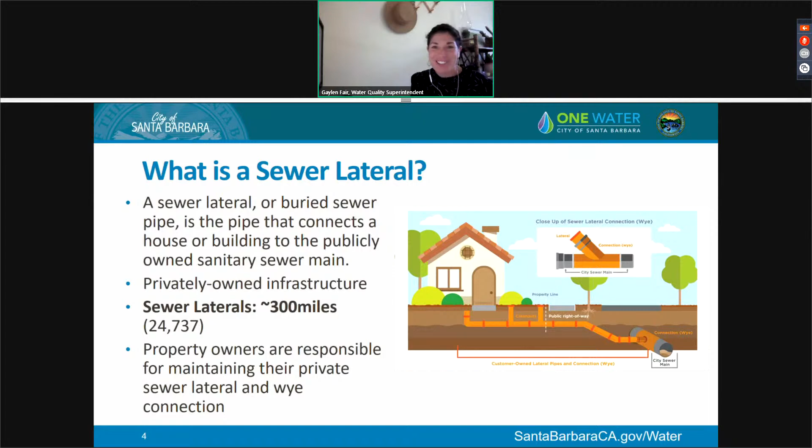So a little bit about the history of the SLIP program. It was developed in 2006 to address failing laterals and increase public awareness of the need to maintain private laterals. City Council passed an ordinance requiring us to develop this program, and it requires property owners to inspect their private laterals under certain conditions, which we'll get into in the next couple slides.

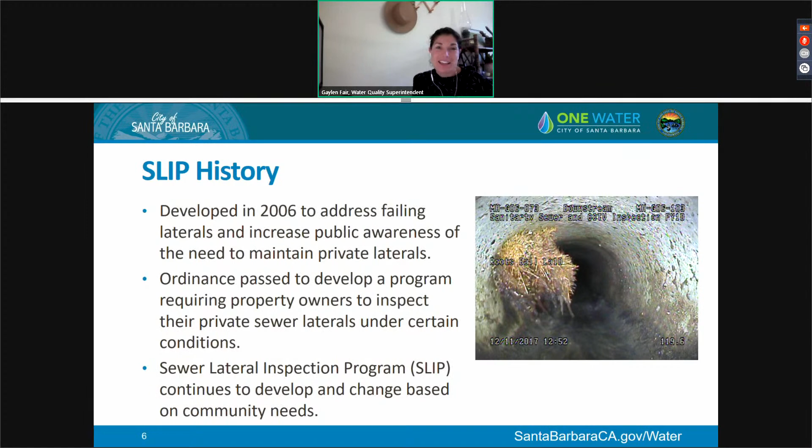The sewer lateral inspection program's inspections are triggered by a number of items. The first is permit initiated. Typically these are ADUs folks are trying to build on their property, or maybe they're remodeling, and they'll be required to do a lateral inspection if they're adding more than 400 square feet, or if they're adding two or more new plumbing fixtures to the site.

Another trigger we've mentioned already is the private lateral spill. If a property has experienced a private lateral spill, there's obviously something going on, a blockage or something happening on that private lateral. So we want to understand and help the property owner understand what's happening, and we request an inspection from them in those cases to get to the bottom of the issue.

Another trigger is defects observed at a connection during city main inspections. The city has our own infrastructure, and we go out and do a great job maintaining those sewer lines, videoing them and doing inspections to make sure our public assets are free and in good working condition, free of roots or issues, and conveying sewage as they should.

When we go out and do these video inspections on our own mains, what we can see is the connection of the private lateral to the city main. If there's any issues at that connection point, be it roots, a fracture, or a crack, we will notify the customer and ask for more information, letting them know we noticed an issue and requesting a video inspection of their entire sewer lateral, because if there's an issue at this point, there are likely issues in other sections of the lateral.

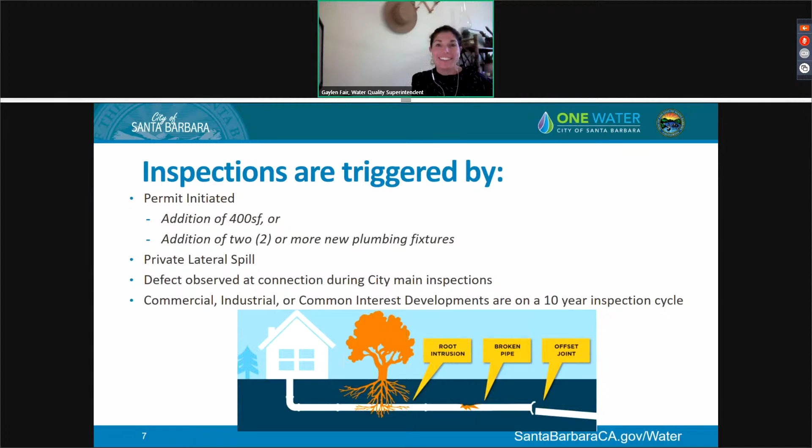So a little bit about the SLIP process. We understand that it can be very confusing to somebody receiving a letter, not understanding what the process is. So let you guys know what our process is.

First, it starts off with an inspection notification letter based on any one of those triggers we just talked about. In that case, a property owner will hire a certified plumber. That certified plumber will inspect the lateral, and they will submit the video and inspection form to our SLIP staff for review. Property owner has about 60 days to submit the video to us.

Once we receive the video, we will review and determine if there are any defects or if the lateral has been properly maintained. If we do find defects, we will call those defects out. We will send out a repair notification letter to the property owner.

And this is really our chance to work with the property owner, communicate with them, develop a plan with them. There is a lot of variability in lateral materials and the different defects that are occurring. So we can set up one-on-ones with property owners and guide them through the process.

Once we've had that chance to communicate with them, they will decide on a solution, hire a plumber or contractor, complete the repairs, and then at that point, they will have a certificate of compliance issued. And that whole repair process, we are asking 120 days for them to complete.

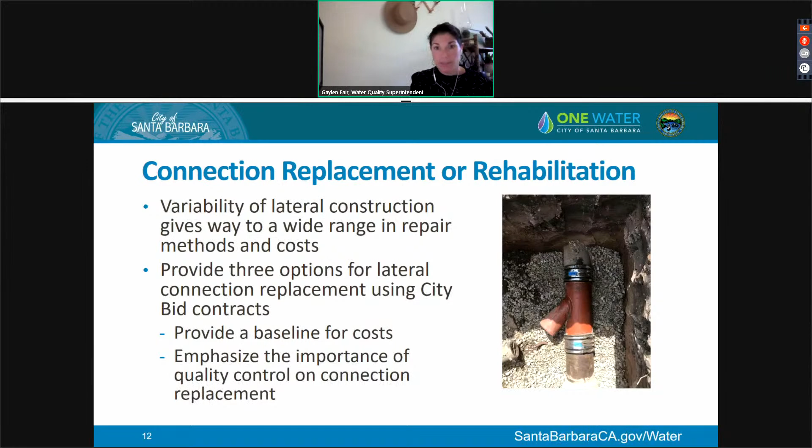So here are the 3 connection replacement or repair options that we have developed. Repair option 1 is a sewer tap or sewer connection replacement. This is the original option that we've been working with throughout the program.

A property owner will hire a plumber, and the plumber will dig the pit. Just to be clear, this is for the lateral connection. It's usually done in the right of way or the street. So this is what brings on the most challenges for property owners.

In this option, the property owner will hire the plumber, and the plumber will excavate the pit in the street. If there is other work needed on the lateral, the plumber can do it at that point. But then we have a city contractor come in and replace just the lateral connection, and then the city contractor's job is done. The plumber will fill in the pit and do any other additional repairs that are needed.

Our repair option 2 is a sewer tap replacement with excavation. In this case, it's just the city contractor who's doing the work. The city contractor comes in, they dig the pit, expose the lateral connection, and then they replace it and backfill. This option is a great one, but if there is any other work needed on the lateral, it might not be the best option. That's why we really want our customers to talk to us beforehand so we can evaluate what's going to be the best option for them.

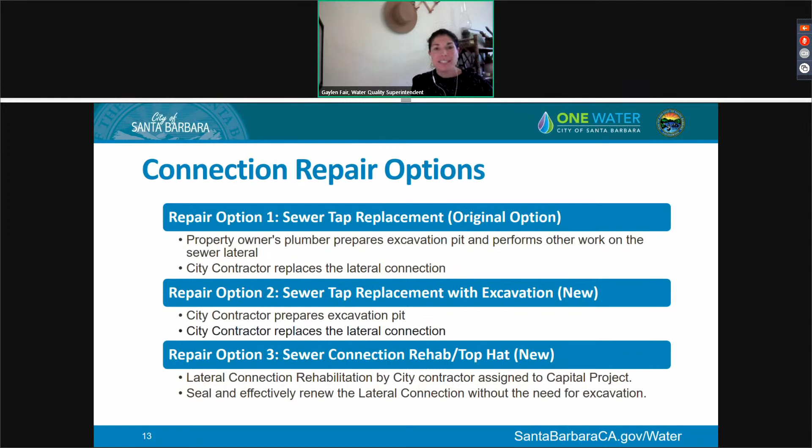Next we'll talk about our video assistance program. I'm going to pass it off to Mariana Cruz, and she's going to walk you through it.

Good morning, Chair Keller, members of the Water Commission. My name is Mariana Cruz, and I am the SLIP Program Administrator. I'm here today to talk to you about the Video Assistance Program.

The Video Assistance Program, or the VAP as we're calling it, is a program that was established to really help property owners with the first step of the SLIP process. As Gaylen showed earlier, there's several steps to receiving a certificate of compliance, and our goal is to help them get started with that process.

And in order to fund the VAP, the SLIP program will be reallocating funds. Currently, in order to help property owners, we are paying to waive the public works permit and inspection fees. Our program is covering that cost on their behalf.

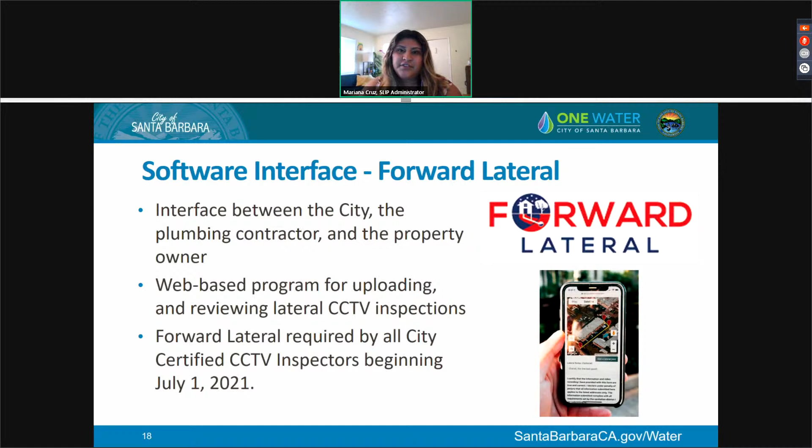The software is called Forward Lateral, an interface that will help connect the city, the property owner, and the contractor. It's kind of like one place where everything can be found. The inspector will be able to submit their videos onto Forward Lateral, and the property owner and the city will be able to track the entire inspection process. We're also hoping to have Forward Lateral be mandatory for all city certified CCTV inspectors starting July 1st of this year.

The cost of Forward Lateral is $30 per inspection. However, those enrolled in the Video Assistance Program, the VAP, will have their Forward Lateral fee covered.

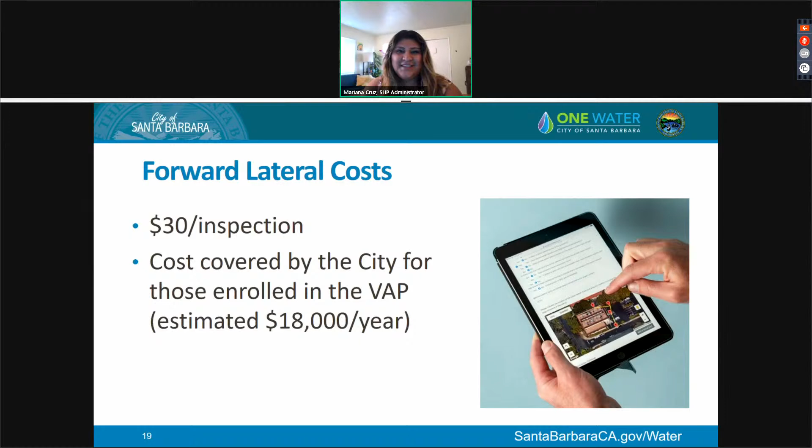There are many benefits of Forward Lateral, including transparency, efficiency, communication, and storing of data all in one place. This is really important, especially in terms of efficiency and time.

The property owner will have access to their video. It'll be stored in Forward Lateral, and they can go in and check it anytime they want. That also cuts back on staff time making copies of videos or needing to meet up with contractors to obtain the videos from them.

The property owner will be able to track the entire process of their inspection. They'll know when the video is submitted by the plumber, when the city has reviewed their video, and they'll be able to see comments on both ends. It really is one place for everything to be stored.

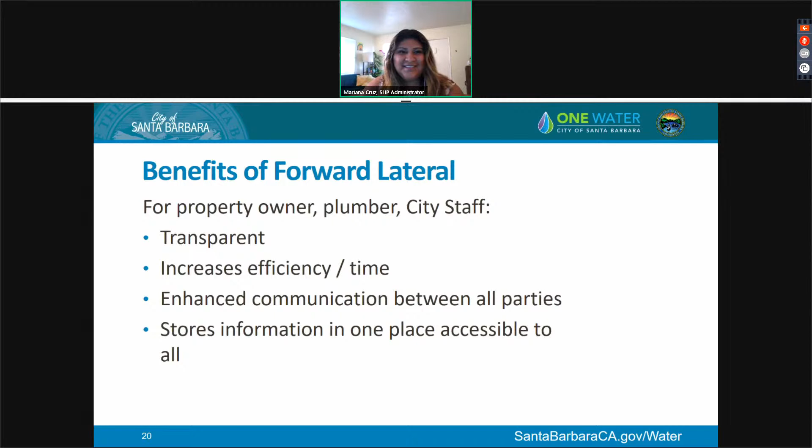So COVID-19 and SLIP, just like every other program within the city, we have had to pivot and make some adjustments due to COVID-19.

One of the things we've really been working towards the last few years is our enhanced public outreach and education. Pre-COVID, we were doing one-on-one appointments, having after hours office hours, as we were calling them. Folks would come down to El Estero or meet us at Public Works, and we could talk in person to our customers and walk them through the process.

We have really had to pivot, as has everybody, to a virtual format. However, we have found that it has been really successful. Folks don't have to take time off work to drive down somewhere and meet somebody. They can just pop on their computer or their phone and have a discussion with us about their case.

One of the other really great things we have done is our virtual trainings. Every year we do a plumber certification course that has over 100 plumbers in the same room taking our certification course. There are logistical things to work out: parking, space big enough, enough food, coffee and donuts for everybody.

Good morning, Chair Keller and Commissioners. My name is Allison Thompson, and I'm the Operations and Policy Coordinator for Heal the Ocean. Heal the Ocean supports this program and is so excited to see the program's growth. It is a long-awaited revise, and the revise is fantastic. Ms. Fair and the rest of the Sewer Lateral Inspection Program team and staff have done a tremendous job expanding the program, updating it, and working on outreach with the community to ensure there are resources and information available for homeowners. The options provided to homeowners takes the fear and uncertainty out of the problem and empowers homeowners with knowledge and background on what can be a very complex and intimidating issue. Sewer laterals are vital to the health and safety of our community, and we hope this updated program will help keep private laterals updated, maintained, and working effectively. We support this program and applaud the work of staff. Way to go.

Thank you for your time. Thank you very much, Ms. Thompson. I think that was really a very strong endorsement. We really appreciate it. And of course, to the people who do this work every day, I think they're doing a tremendous job.

Any other public comment? Chair Keller, there is no more public comment at this time. Okay, well, thank you very much. So we have these 2 recommendations at this point. Let's take a vote on that in terms of endorsing those recommendations.

Commissioner Young, did you have any questions or just for the vote? No questions. Do you need a motion to move? Yes, I need a recommendation motion. I'll make that motion to move both recommendations forward. Thank you. Do I have a second? I'll second. Thank you. Can we have the roll call, please?

Yes. Commissioner Coony, yes. Commissioner Young, yes. Vice Chair Davis, yes. And Chair Keller, yes, enthusiastically.

Okay, well, thank you very much. So next in our agenda, we have, and I just lost my point. If you can put it up there, I lost my... okay, the proposed utility rates. Thank you. Mr. Hamilton, please provide that, and Ms. Fliss.

Thank you, Chair Keller. I'm excited to introduce Mr. Hamilton today to present our final results for our water rate study. This is our 3rd time, and hopefully we can have some great discussion about the long and hard work that has been done by Mr. Hamilton and HDR to get here on our water rate study.

Thank you very much, Ms. Flessy, Chair Keller, members of the Commission, Liaison Sneddon. Happy to be here today with Shawn Koorn from HDR Engineering to present the final proposed rates. I'm going to turn it over to him fairly quickly here, but I did want to make a couple quick notes before we jump right into it. If you looked in your packet that was sent out last week, we included an attachment, which was the draft Prop 218 notice. In that attachment, there were 2 highlighted sections.

There was a section for master meters that was highlighted. We were still finalizing that rate, and included in this presentation today, we will show you the proposed master meter fees. Shawn will explain a little bit more about how they kind of straddle the line between a rate and a fee. They do go on the water bill, but recuperate costs slightly differently. Secondly, we had highlighted that in the model, we found that we had just inadvertently skipped over the 4-inch fire line rate. And when that was added back to the model, it kind of has ripple effects throughout.

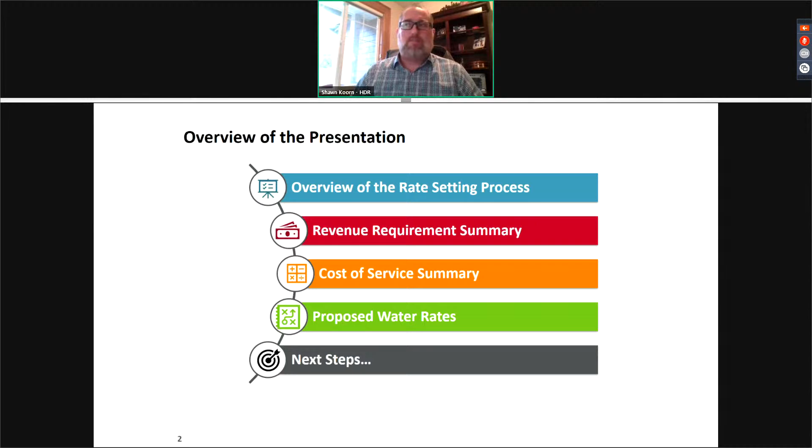As part of that process, we go through this analysis and development of the rate model to meet those requirements of Proposition 218. We do this by taking generally accepted methodologies, but they're tailored specifically to your system, how it operates, how it's being funded, and how your customers use the system on a monthly and annual basis.

As we go through that, we also don't want to lose sight of some of our prudent financial planning criteria, such as maintaining our legally required debt service coverage ratios, adequately reinvesting into the system to maintain that renewal and replacement aspect, as well as meeting the council target minimum reserve levels.

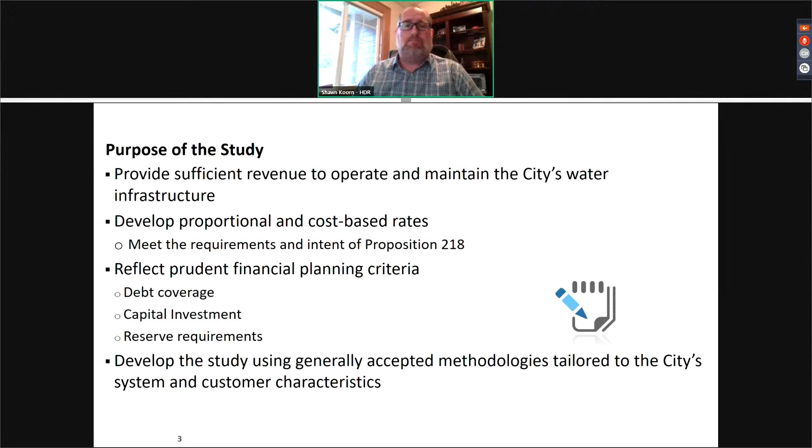On the next slide, we have the start of our overall revenue requirements. And the next slide provides the summary.

Remember, as we've walked through this process, we really have a couple different components that build up our revenue requirement. It's our annual O&M expense. It's our rate-funded capital, that renewal and replacement funding that goes back into the system each year. It's any existing or future annual debt service payments, as well as any reserve funding, any funds that are being put into reserves to meet minimum reserves or to fund future capital improvements.

As we go through this process, we're focused on the next 3 fiscal years: fiscal year 22, 23, and 24.

Now, in the prior discussions with the commission, we have talked about some of the key assumptions. When looking at the O&M, or the first blue bar, remember that that includes the impacts from the community choice energy implementation, as well as the current costs and projected costs to operate and maintain the utility.

On the capital side, as we've talked about, we are transitioning to a higher level of ongoing capital investment to meet the council policy of replacing 2% of the city's water mains on an annual basis. Remember that these costs, the operating and capital, so both rate-funded capital and annual debt service, are funded entirely through the water utility enterprise fund revenue, so the revenues received from customers primarily, and some other additional revenue for ancillary services that go through the process.

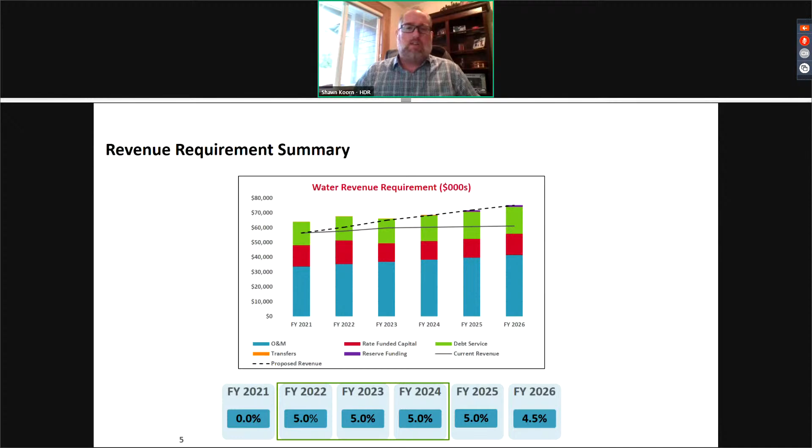So once we know that, the next slide starts our cost of service analysis. I wanted to keep the slide like this to talk about why we do this. Our goal is to equitably and proportionally allocate that revenue requirement between the different customer classes of service.

We do this because almost all of our costs are joint costs. They're in place to serve all our different customer types, our residential, multifamily, commercial, and irrigation customers. And so we go through a process to evaluate why and how we incur a cost and who benefits from that process.

The whole ultimate end of our cost of service is the unit cost. Those unit costs become the rates in year one. So each time you do a cost of service study, this is a reset. We reset the rates based on the cost of service.

We adjust by the overall revenue percentage, that 5% in fiscal years 23 and 24, across the board to everybody. Then in order to raise rates again or increase rates, you would need to go through another cost of service and Prop 218 process. That would ultimately provide you the basis for unit costs and possibly a reset.

Because each year we do a cost of service, we're basing it on the system costs for this upcoming rate setting year, as well as the customer characteristics, which can change from cost of service to cost of service.

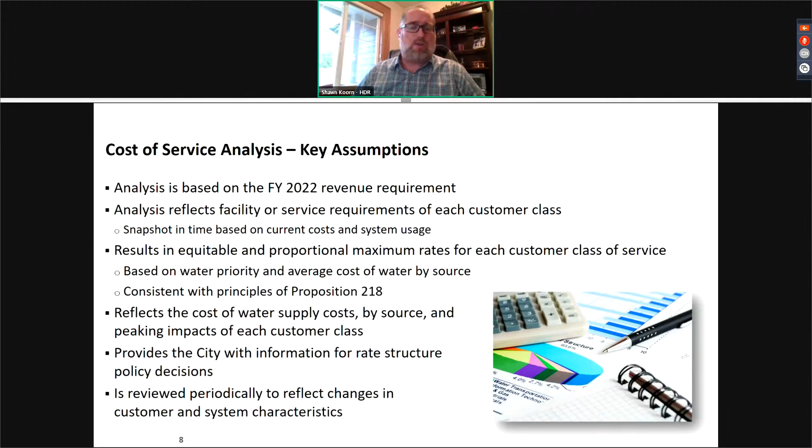So what this looked like for the fiscal year 2022 cost of service is on the next slide. We put this on here graphically to look at that. The vertical black line is showing the system average, and that's the 5% overall revenue change that we need to meet our operating and capital costs.

The horizontal hashed lines for each customer group, single family, multifamily, recycled water, commercial, industrial, irrigation ag, irrigation rec, and irrigation urban, reflect the results of the cost of service, how they incur costs, the cost of that water supply, and how they use that water supply.

And so the closer we are to the 5%, the better we are. In general, high level, all customer classes, with the exception of irrigation ag and irrigation rec, are very close to that overall center. That talks about how you've consistently completed cost of service analyses, reset them, adjusted, and moved forward with those proposed adjustments.

So overall, this is a good result, but we do know that we have these two outliers as part of that. That's something we talked about last time when we met with the commission on how, from a policy perspective, we can move forward and transition those two customer classes.

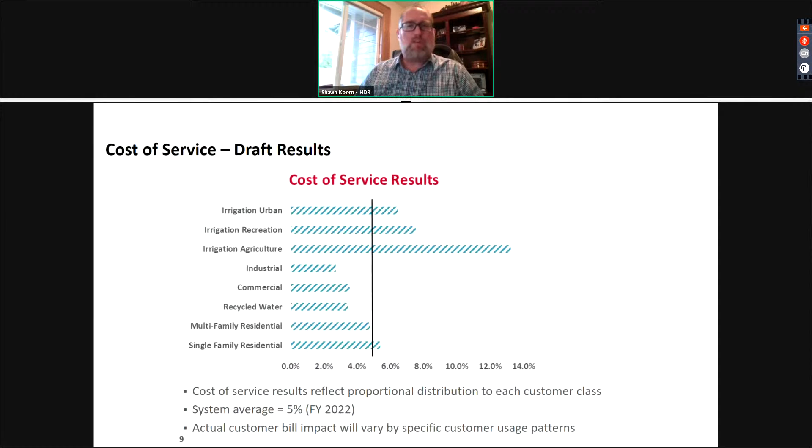So as we take this information on the next slide, we can then take the cost of service results, and we can take the revenue requirements, so the overall cost of the system, plus how we allocate and distribute those costs to each customer class and design rates to meet that.

So as we go through this process, the next slide talks a little bit about how we've developed the rates. Our cost of service unit costs provide us the maximum proposed rates for each of the customer groups or classes of service and rate schedules.

We are not proposing a change to how you charge your customers, so no change to the structure or what they're used to seeing. It's really only a change in the level of each of those components, and there's really two components for each customer group or rate schedule.

One is the fixed meter charge. That is the same for all customers with the exception of the private fire line charge component. We set that on an equivalent basis, and then that is adjusted by meter size based on the meter equivalency or capacity that those larger meters can place on the system.

On the variable or consumption charge, that's based on each customer group's or rate schedule's overall cost based on the supply of water, the delivery of water, and the use of the system on an annual basis to come back and determine what that overall cost is.

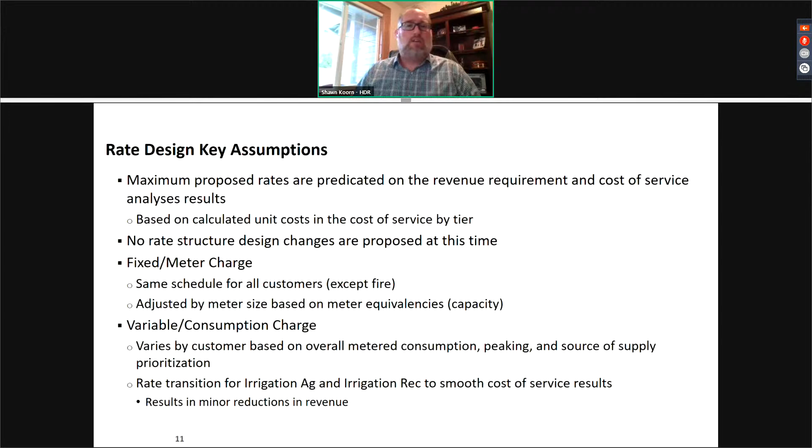So based on that, we can go to the next slide and discuss the proposed rates that we've developed. These are the fixed monthly service charges. Going down the slide is the size of the meter.

The majority of your customers are up in that 5/8, 3/4 inch meter basis, but we do have larger commercial customers and some multifamily customers with larger meter sizes.

Those rates, if you look at the present rate column, the second column from the left, you will see that the present rate increases as we get to the larger meter sizes. That is based on those meter equivalencies or the capacities to reflect the demands that those larger meters place on the system.

The proposed fixed monthly service charge based on meter size, you can see in fiscal year 2022, increases fairly minimally. It's roughly a 2.3% change, under 3% change for the majority of your customers with a 5/8 and 3/4 inch meter, and then slightly different for those larger meters just as the overall ratios are put into place.

As we move into fiscal year 23 and 24, the right-hand two columns, you can see that those have been proposed as well based on an overall increase of 5% for each meter size. So again, we reset in fiscal year 2022 based on the cost of service, and then we adjust for the next 2 years across the board based on the overall percentage change in revenue needs.

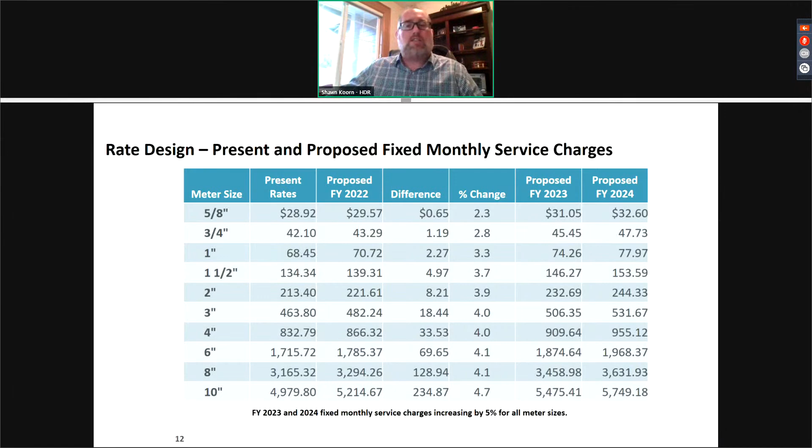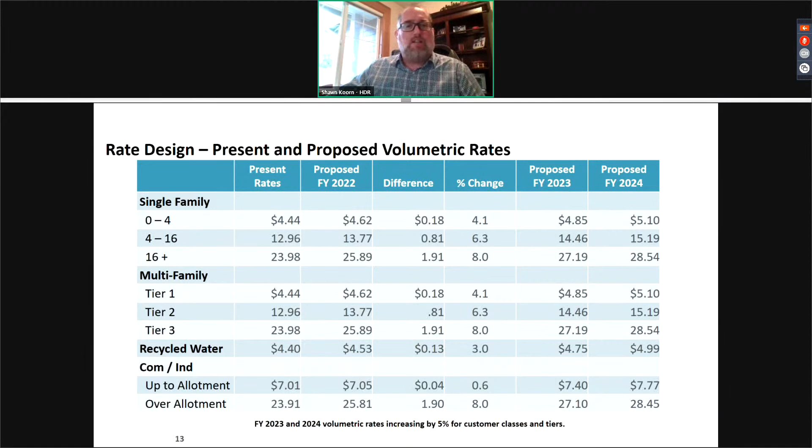The next slide continues our volumetric rates for irrigation ag and irrigation rec customers. In this proposal, we adjusted the rates as evenly as we could through 2024, so the fiscal year 2022 impacts for both irrigation ag and irrigation rec are muted. You can see irrigation ag is about 10%, irrigation rec is 7.2% on the up-to-budget component, the first tier of their budget component for their rate structure, rather than the cost of service results where irrigation rec and irrigation ag were up farther to the right of the overall adjustment.

That's been phased in over this 3-year period. In fiscal year 2024, those rates are at the levels that would be projected had we implemented the cost of service results, as well as the fiscal year 23 and 24 rate adjustments across the board. Irrigation urban also has a similar change, 6.3% and 8% in fiscal year 22, based on the cost of water supply and delivering those supplies to the customers.

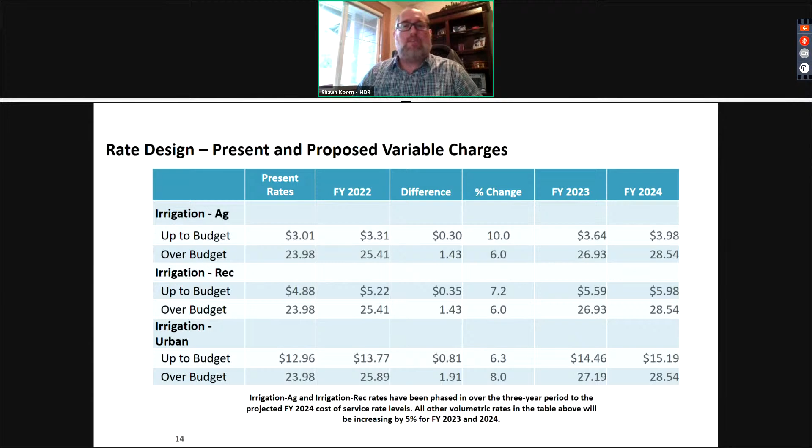The next slide provides a summary of our auxiliary master meter fee. This is what Mr. Hamilton referenced at the beginning of the meeting as a separate rate/fee. Really, this is a separate meter, given the configuration of trying to serve customers behind this meter, being able to set a single meter so the city can account for all the water that goes through that meter, which then has sub-meters for maybe some of the different customers behind that. This really comes back and is based on the actual cost to provide that service. It sums up the overall operating, material, and facility infrastructure requirements necessary to maintain these auxiliary meters. They are charged to the water customers on the bill, but it's more of a fee-setting process based on the specific service these customers are receiving through this auxiliary master meter component.

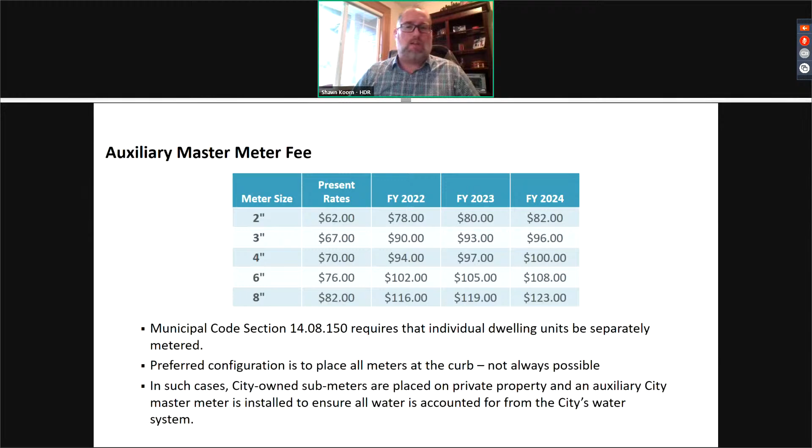The next slide provides a summary of the private fire line charges. These are very similar to the meter charges for customers, but they're an additional charge on the bill for customers that have a separate fire service line to provide fire suppression. When we look at buildings and see the sprinklers up in the ceiling, generally those are served through a different line than the domestic water use. Based on the cost of providing that standby capacity, or building the system big enough from a pipe, pump, and storage perspective, we calculate what that standby capacity cost is. It's calculated similar to a fixed meter charge in the sense that the larger the service line, the higher capacity or greater standby capacity is necessary.

The calculation is different though. It's based on the demand characteristics, or how much water can physically get through that pipe. If we jump down to the bottom, that's a 12-inch pipe that individually goes into a facility, a building, a very large building that needs that level of fire protection. That 12-inch line is the size of some of the lines running through your streets to provide service to a multitude of additional customers. It's a very large service line that is there to meet those fire protection needs of those customers.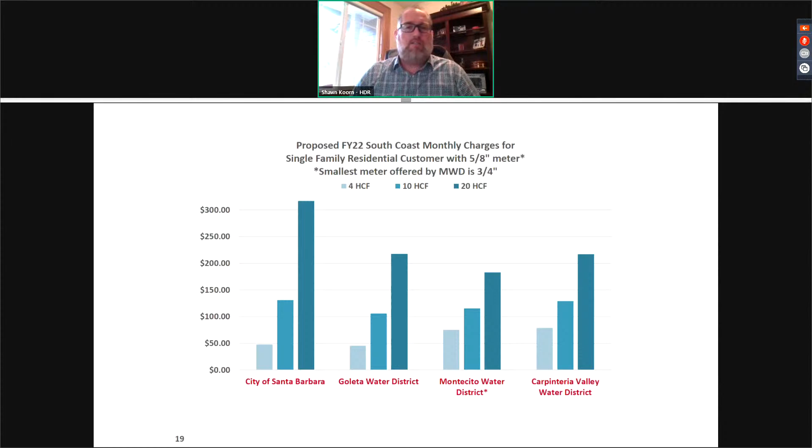On the next slide, we have our next steps.

Overall, the recommendation here is to implement the cost of service results and the proposed rates as developed in the study. We're also recommending the phased approach for irrigation recreation and irrigation agriculture to minimize the bill impact to these customers, understanding there's a minimal loss of revenue in those first two years as part of this.

Ultimately, next steps is bringing this back to the Finance Committee on March 30, based on the input and direction this morning, and then ultimately a public hearing on June 15th, where the council would go through the Prop 218 public hearing process, tally any protests, and then if there is no majority protest, the council would have the ability and authority to implement the rates. And with that, I will turn it back over to Chair Keller and staff to answer any questions you all may have.

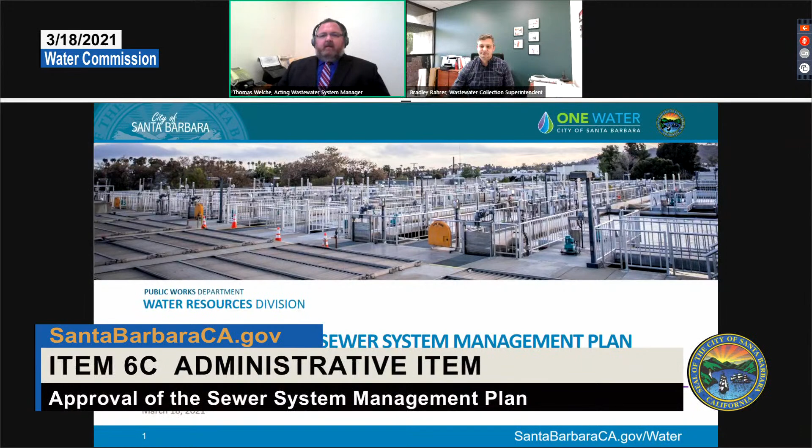Thank you. Good morning, Chair Keller and members of the Water Commission. My name is Thomas Welche, I'm the acting wastewater system manager. With me I have Brad Rahrer, our wastewater collection superintendent, and we're here to update and recertify our sewer system management plan. I'd like to hand this off to Brad. I will stay on if there's any questions as we go through the process.

Thank you, Thomas. Good morning, Chair Keller and the commissioners. I'm happy to be here today to walk us through the recertification process for our sewer system management plan. Next slide.

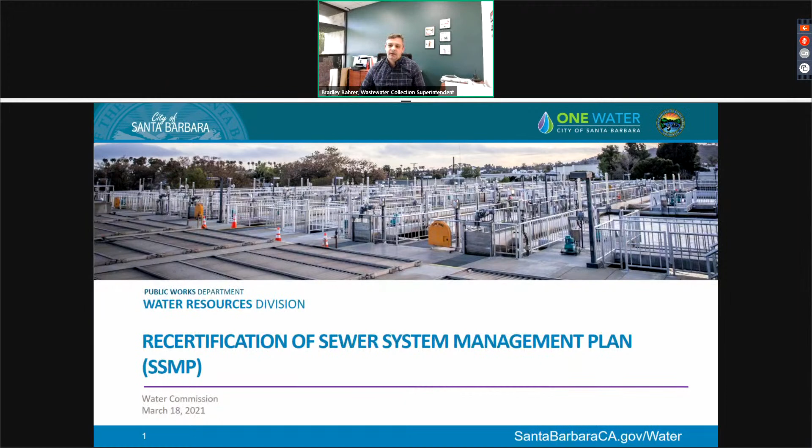It should be a pretty short presentation today, there's only a few things I'd like to highlight. We're going to go over the background of why we do a sewer system management plan, what the requirements are, highlight a few of the changes since the last time we presented this about 2 years ago to Water Commission and then ultimately to Council. So the 2018 sewer system management plan, and then review our recommendation.

Next slide. So in 2006, the state adopted a general order through their sanitary sewer system WDR, and the order really did two main things. Prior to 2006, there was a lack of requirements and paperwork needed to operate a sanitary sewer system.

And so in 2006 they adopted this order, and for any collection system greater than 1 mile, they required them to do two things. The first was to develop a sewer system management plan. And then the second was to begin submitting all sanitary sewer overflow data into the state's centralized database called CIWQS.

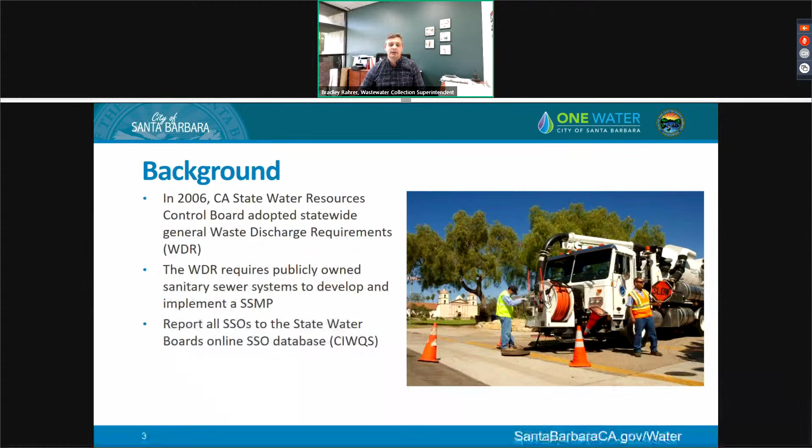CIWQS stands for California Integrated Water Quality System, and that is where we enter all of our spill data when it occurs. Next slide.

So what exactly is the Sewer System Management Plan? It's a document that identifies 11 elements of requirements that the state requires us to submit. I commonly refer to this as our operations business plan. It covers our maintenance, operations, emergency response, and capital improvement plans. It also highlights our standard details, our construction design standards, and how we generally operate and maintain this as our business.

So in front of you, you have the 11 elements. The document's broken into 11 elements, and you can see what it covers. The document itself is roughly 350 pages, so it would be exhaustive to go through the whole thing, but today I'm going to highlight a few of the changes that we've had. Next slide.

So again, the Sewer System Management Plan is really considered a living document. The state wants it to be a living document. They want feedback, and they want to make sure that it doesn't just sit there on a shelf somewhere. So the document is available on our website, as well as through the state's centralized database, CIWQS. So anybody who's interested in looking at this document can see the most recent adopted one available there.

The state has a few requirements in their order. They require us to update it at least every 5 years to capture any significant changes. It must be recertified by our governing board, in our case that would be City Council. And then every 2 years at a minimum, we need to go through that document to evaluate the effectiveness of the plans in that document, as well as compliance with the plan requirements.

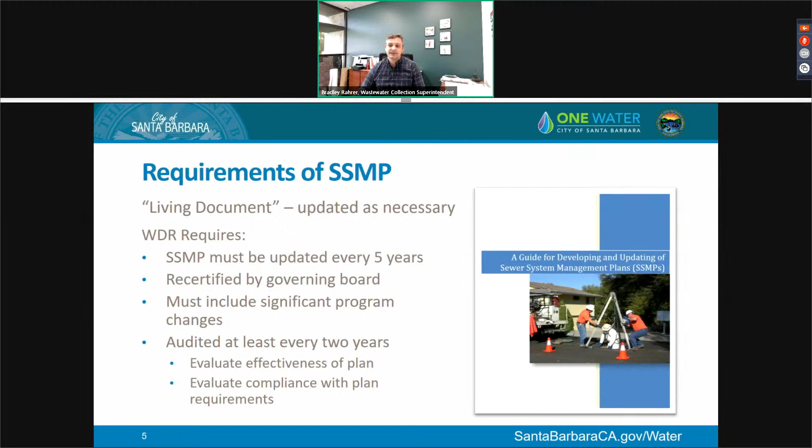So this gives you an overview of the timeline of our past actions. As I stated, this started in 2006 with the initial order. There was an amendment in 2013, primarily focused on water quality monitoring, and so they increased some of the water quality monitoring requirements due to spills.

So you can see on the timeline, we initially drafted the document in 2008. We've had a few recertifications and audits in the past, but today specifically I'm going to be talking about our recertification audit that happened in June of 2020. Staff over about the last 4 to 5 months have been working on capturing the audit report findings and making sure that our document is as polished as it can be.

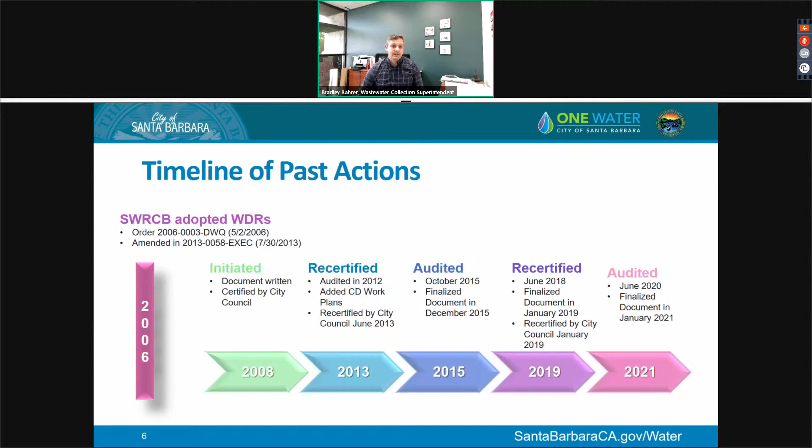I should say that we did hire a consultant, HDR, to perform the audit for us. Their contract was executed in May of 2020, and shortly thereafter they conducted the audit.

So the way the audit report is broken up is they identify major deficiencies and minor deficiencies. We had 2 major deficiencies, but nothing was really out of compliance - that would be the worst case scenario if something was fully out of compliance. The 2 major deficiencies identified were that our water quality monitoring plan could use a little bit of updating and enhancement, and also our lift station and force main preventative maintenance plan requirement from the State Water Resources Control Board. I'm going to highlight the updates that were made there.

But we also wanted to capture a major change that happened on how we conduct our closed circuit television program, or the CCTV inspection and condition assessment program that we have within my group. In 2020, we upgraded ITpipes, and so we wanted to capture the new business processes that are part of that new software that get implemented.

So with our water quality monitoring plan, the audit report indicated that the roles and responsibilities could be clarified better between my wastewater collection operations staff and the water resources lab. Specifically, some of the areas that were kind of vague were in the response plan to assess the impact of sanitary sewer spills greater than 50,000 gallons.

Fortunately for us, that would be a major spill, and we have not experienced one of those recently. And so that's why they said it's better to work through the plan now and develop those protocols for sampling and who's going to do what in the case that you ever did run into one of those.

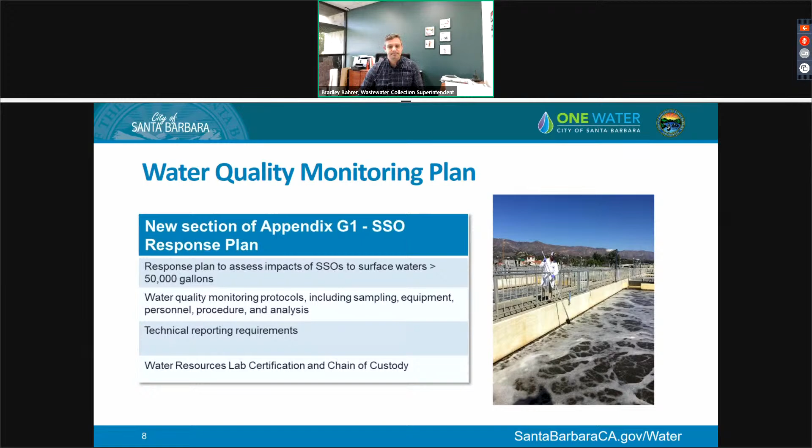So the other major deficiency was on our lift station and force main preventive maintenance plan. What I want to highlight here is that it's not like we haven't had a document for this before. The auditors came in and they looked at it from a perspective that while we have a lot of great documentation on the condition of our lift stations and our force mains, we weren't capturing in our SSMP exactly how we were doing the preventative maintenance.

And that's sort of an organizational barrier, if you will, because it's managed by a different group here at El Estero. And so we conducted a series of meetings to basically help record what they're doing out at the lift stations to improve the documentation that we have in our sewer system management plan.

So that was kind of a major change or look to the document in that area. But in reality, it's not like we're doing things now that we haven't been doing for the last several years. And in fact, I can assure you our lift stations are operating very well. We rarely have problems as far as sanitary sewer spills at the lift station, because we have a great staff that manage those.

So we also highlighted the types of staff and the roles in supporting the plan. That wasn't clearly identified in previous documents. We also documented what the lift station maintenance staff's plan and workflow is for handling their work.

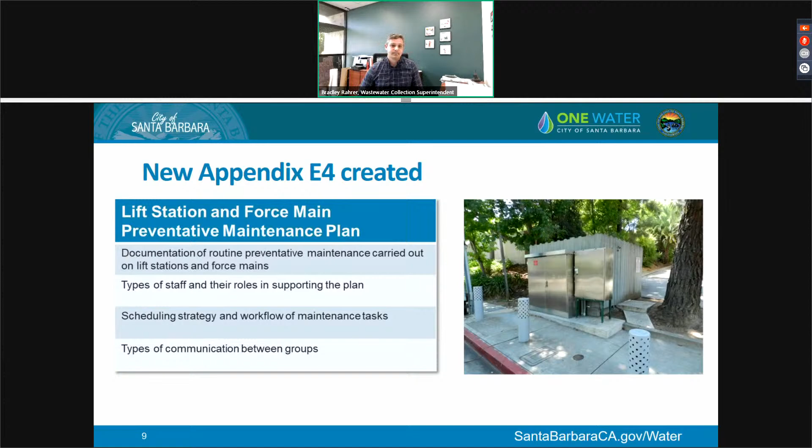And last but not least, staff felt it was important to update the documentation for our condition assessment and CCTV program. In the past, we had a system for probably the last 12, 13 years called POSM, which was a pipeline observation system management software that stored all our CCTV data. That system is a little antiquated now, so we went out for an RFP in 2020 and selected a new system called IT Pipes.

Some of you may recall hearing me present on that before. The old document had a lot of legacy information as far as how workflows were captured in that software, so we converted all the workflows to an IT Pipes workflow.

We also highlighted that the new IT Pipes system is cloud-based. It's accessible even outside the city network, so that's good for staff if they need to access the data when they're not tied to our network. We also highlighted some of the new reporting capabilities. The picture you see in front of you is a screenshot out of the software, and it highlights the video. It also shows pictures from the inspection, and then it shows the distance and defect observed by staff.

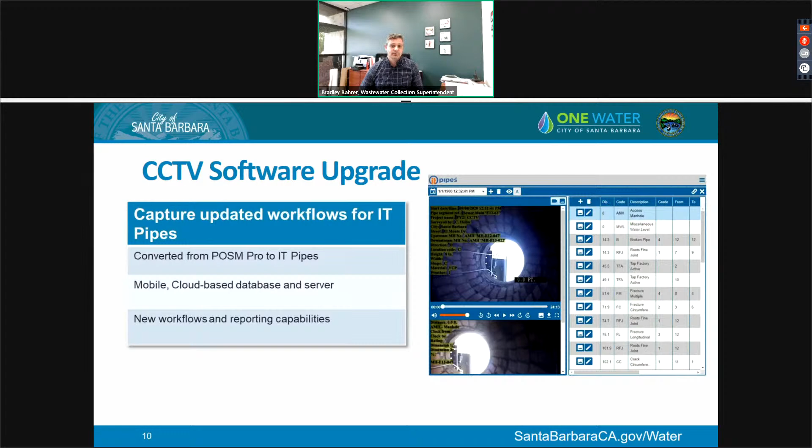Staff have been using this now pretty routinely since about October, November of 2020, and we continue to enhance those workflows as we go. Next slide.

So that kind of goes over the majority of the major changes. The remainder of the other changes are fairly minor, or are correcting staff names, roles, positions, things that might have changed since 2018. Now we're heading into the recertification phase where we're hoping to go to council and get the document recertified. If we are successful in doing that, we would be looking at another audit here in 2022, that would be our 2-year cycle.

What's interesting to note here, and that's why I wanted to include this slide in our presentation, is the state is currently going through an update to that general order that I mentioned was initially developed in 2006. They notified us in February this year that they're planning to move forward with some form of adoption in 2021. They have some workshops coming up in April that Thomas Welche and myself will be participating in, in order to see what kind of impacts this new order would have on the work we're doing with our sewer system management plan.

So right now we're here at Water Commission today. We plan to go to council on April 13th, 2021. And then we would be looking at an audit in June 2022, sometime down the road. So with that, next slide.

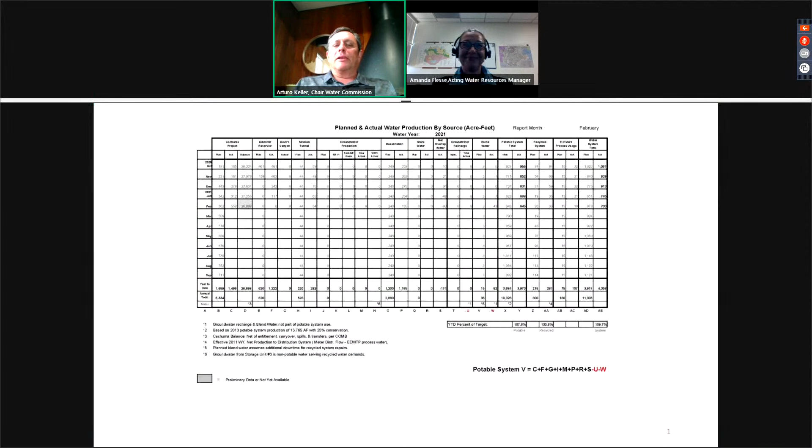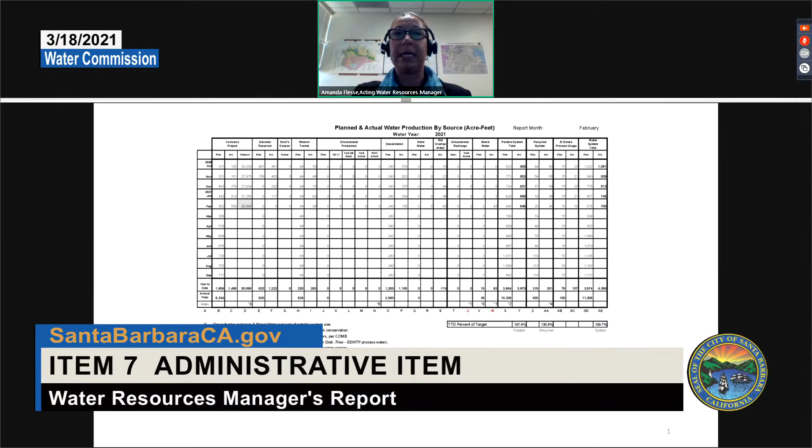Thank you, Chair Keller. Each month we present our monthly manager's report to show where our water supply is, also where we are with our SLIP program, and also where we are with our COVID testing. Does anyone have any questions about the report before I begin? I was just going to touch on a couple of highlights. Yes, Chair Keller, I don't have a question, just in case anyone has questions. Any questions or comments? Okay, so let's go ahead with the highlights.

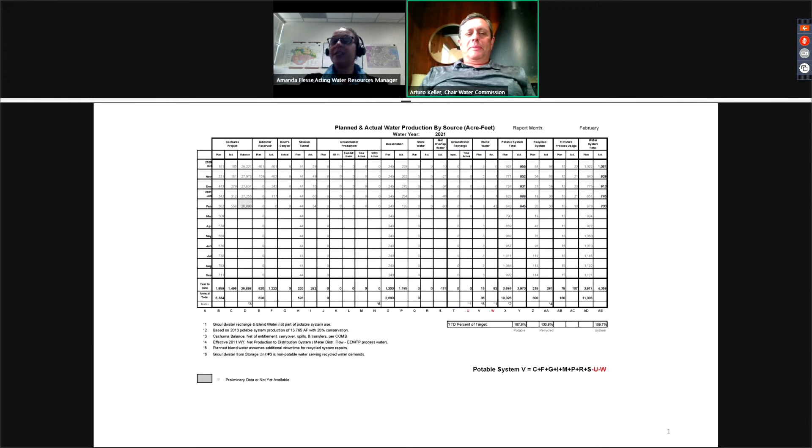Sure, if we can proceed, we can move forward. We're still doing well in our water demand. We're still conserving, as our drought records show.

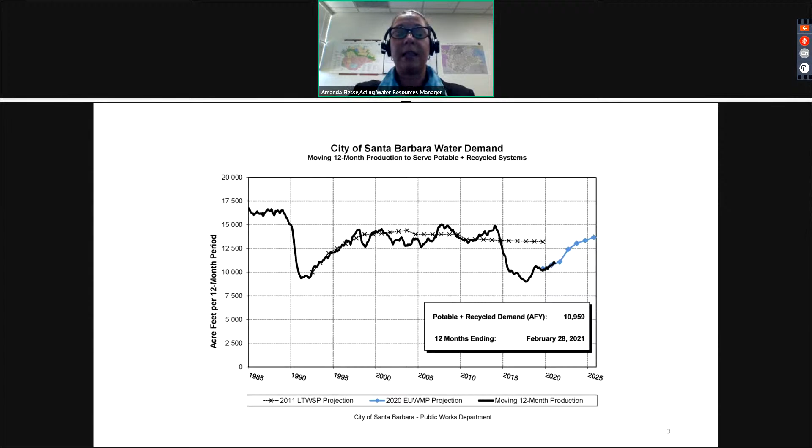So what I wanted to highlight was our recycled water. If we can move to that graph. Keep going. There we go. So we took down the recycled treatment plant in February for a scheduled repair. We scheduled that in February, hoping it would be a wetter month with the least amount of demand. I wanted to show and highlight that yes, we were blending water at the end of January and into February, and those repairs were successful.

We were gearing up for the summer to make sure everything is copacetic and we are prepared for the summer demands without the breaking we had been experiencing the past few years. For those who remember or weren't on the commission, with the recycle plant we kept experiencing water hammer in our piping system. Last year we were able to reprogram a lot of our valves and we reduced and almost eliminated a lot of that water hammer. So what we did in February is we changed out a lot of the piping that was really damaged from that water hammer and on the verge of breaking. We just changed out a lot of those weaker points. Now we should have a more reliable, more robust system as we head into the spring and summer months.

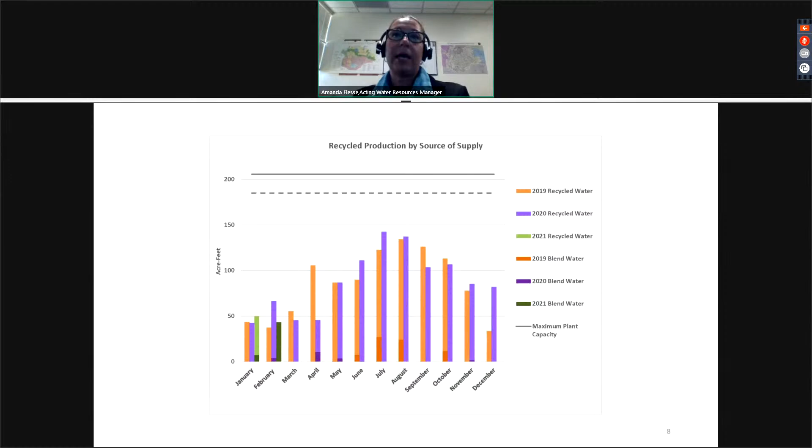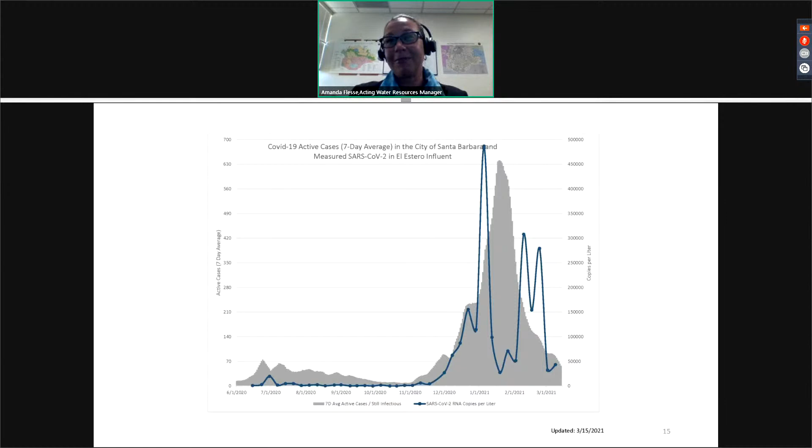Okay, if we can move forward to the COVID graphs. There's our COVID graph. So we are going up and down in our peaks. It could be a number of things - it could be our sampling, or it could be we had a 3-day weekend, MLK weekend. We also had the Super Bowl, which kind of added to the spike. What will really be interesting in March is how we see other holidays like St. Patrick's Day, which was yesterday, or the reopening of items. It will be really interesting how we see this graph over time - whether the vaccines, whether we are keeping up with our vaccinations, with our openings. So it'll be really interesting. Any questions?

Okay, thank you very much. As always, this graphic is interesting, and it's got surprises and things that we're still trying to figure out how to best interpret. I had a question more on - we didn't touch it much - but we had very little rainfall, and Cachuma storage continues to go down.

So what are your thoughts in terms of what that means for us if we don't get any more rain by the end of this water year? Well, desal has really allowed us to store water in Cachuma, so that is the great thing. We have really been able to save a lot of our Cachuma water, and so this coming year our water supply is pretty stable because of that. Great, thank you. You're welcome.